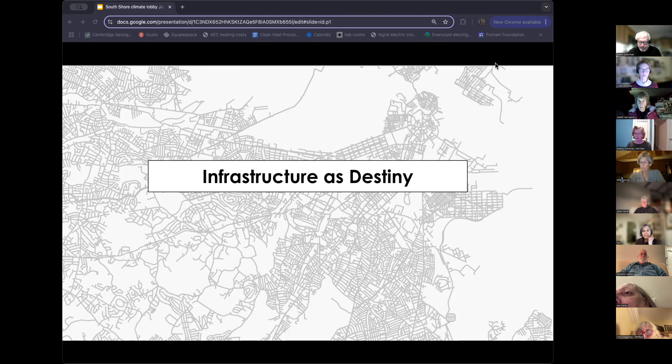Infrastructure as destiny is a phrase I happen to really love. It was made popular by Robin Chase of Zipcar. She pointed out how highways and the internet provide and shape opportunities in all sorts of different ways. And I think that phrase is even more applicable right now to energy infrastructure, not just in terms of affordability and accessibility, but also in terms of climate change.

Especially right in this moment now, we have the chance to change that infrastructure in ways that I think is bigger than any other time in Massachusetts history, where we're not only trying to figure out how to decarbonize, but we're also re-looking at the gas utilities and their infrastructure, as well as how the electric utilities will deliver the electricity we need to be able to move all of our energy needs to clean electricity.

So I'm just going to say, this is the moment. If you ever wanted to get into energy, you can be a hero. So if you want to be a state regulator, you want to become an energy analyst, and of course, you want to become an energy activist or academic, do it now. It is like the biggest, most exciting time.

And so again, I'm going to say that I'm not with HEET anymore. I'm now with HEETlabs. It's a climate solutions incubator. I find really big problems that currently no one is taking effective action in. And I use the black swan as my logo because black swan events are highly unlikely events that can have really big impacts. Most people think of things like COVID and Fukushima, but it can also mean things like discovering penicillin and passing civil rights. So it's just as likely to be a good impact as a bad impact. And that's why that's the logo.

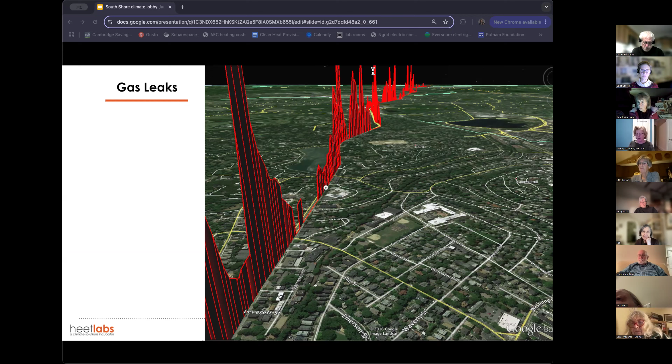So this started off way back in 2014 when I got really interested in gas leaks, partly because there was a Boston University professor who published research showing that there were over 3,000 gas leaks in just Boston alone, and that those gas leaks, because it's methane, which is such a potent greenhouse gas, erased all of the state's energy efficiency programs. So I began to look at gas leaks.

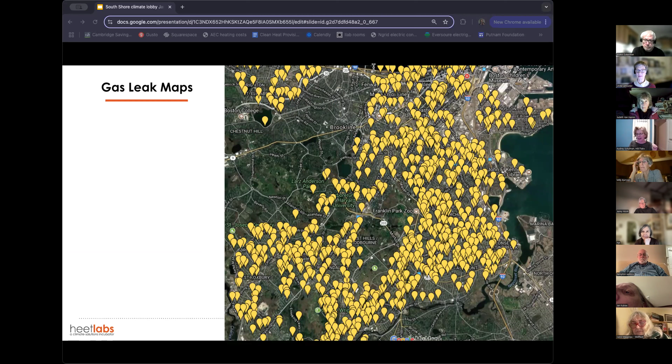I found this really arcane filing on the Department of Public Utilities website that listed by address all of the gas leaks across the state. So I spent a summer with some volunteers mapping all of those gas leaks. There were 350 towns, I think. And it got a lot of news, including the top of the Boston Globe, above the fold, which meant that all the gas utilities suddenly focused on HEET, which they'd never heard of before.

And those gas leak maps got a lot of interest with legislators too. I would bring the maps in to legislators and others, and everybody would always zoom in immediately to their home or their school or their business. It made the global very, very local. But we didn't know quite what to ask for, right? Because the gas utilities couldn't fix all of the roughly 30,000 gas leaks across the state at that point.

So then we learned from research from Boston University about super emitters, which are the roughly 7% of leaks that emit half of all the gas by volume. And so bingo, we knew immediately what we wanted to do, which was have the gas utilities fix these super-emitting leaks. But the problem is they didn't know how to identify them because they'd always been focused before on safety.

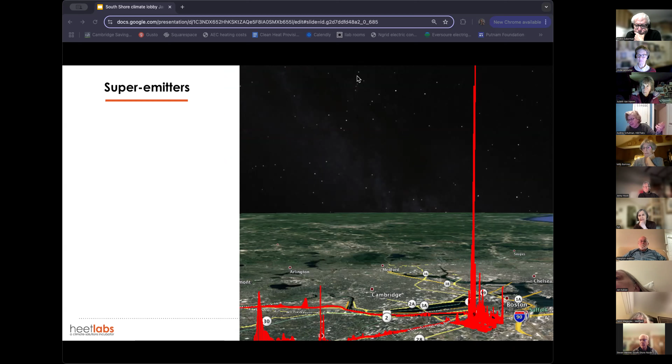And safety meant gas leaks in a small contained space, because gas cannot explode unless it's between 5 and 15% of the air by volume. So if it's less than 5%, you can't light it on fire with a match. And if it's over 15%, you couldn't even use a flame torch and get it to explode, which is sort of fascinating. So they'd always looked at contained spaces instead of these big gas leaks that could be just in the middle of the street and not contained. So we worked to persuade the gas utilities, which we were by then beginning to get to know simply because they were sort of flipped out by the gas leak maps.

So we connected both with Columbia Gas of Massachusetts, which is no longer working in Massachusetts now, as well as Eversource. Both of those companies agreed to participate in the research study to try to figure out how to identify the big gas leaks, the super-emitting gas leaks, so that they could be repaired. But we couldn't get National Grid to talk to us.

So here's trick number one. I guess I should say trick number one first is talk reasonably to gas utilities or to whoever you need to talk to. They're the ones who can repair the gas leaks. I can't repair them, not with a shovel. I don't have a backhoe, etc. I don't have the expertise. They're the ones who have to do it. So talk nicely, reasonably to the people you need to talk to.

Explain the reasons why they should be listening to you, and, you know, research is a great way to get them interested. Because if you talk about how you can research and prove the results in a data-based way, they don't get quite so worried that you're going to just go crazy on them in many ways. But we couldn't get National Grid to focus on us or meet with us.

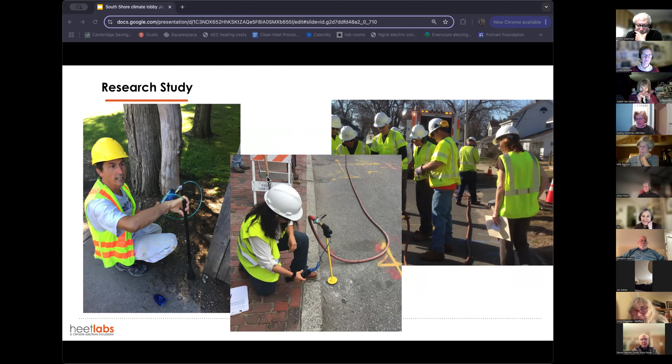We did so. And we came up with an easy proxy method that was highly accurate, for the gas utilities to identify the super-emitting gas leaks. And this is, whatever I'm at, suggestion number three. We arranged this whole thing from the very beginning to have a summit at the end of the summer, at the end of the research study, to announce the findings.

And we asked the heads of the gas utilities at the very beginning of the summer to come and speak at this summit. At MIT, very prestigious, sounds so exciting. And gas utilities rarely, if ever, get to present with environmentalists. And we made sure to invite every regulator we could, every legislator we could. So the gas utilities really wanted to be there.

And so once again, we had that same sort of problem where Columbia Gas immediately agreed to, yes, of course, we should use that proxy method, the identification method you came up with. And Eversource also agreed, but National Grid was a little bit slower. So the Sunday before, I think it was like 2 days before the summit, the head of National Grid called me up with like 15 people on the call.

And all of her experts, and she basically berated them until they would agree to do what we wanted them to do so that she could go and speak at the summit. So once again, giving a carrot as well as doing demonstrations, as well as talking about, like, we're unbiased, this is research. These are ways to begin to pull in the people that you need to pull in to get them to listen to you and do what you want.

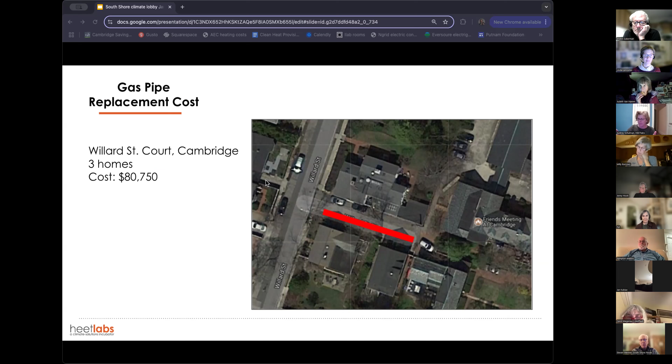So anything installed today will only have 25 years of a lifetime in the street. And that's a waste. That's called stranded assets. It's a bad idea economically. So we went into each of those gas utility offices, to the presidents of each gas utility. And we said, hey, we've got a crazy different idea. First off, you're installing stranded assets today.

You can't imagine the craziness of going into gas utility presidents back then, which was 7 or 8 years ago now, and say, hey, you are going to go bankrupt. You're installing stranded assets. You need to change your business model. But that's what we did. And we said, install something that can be non-emitting, non-combusting, and that can deliver not only heating, but also cooling.

And so we suggested networked ground source heat pumps or networked geothermal. It's a closed loop system, so you're not refilling it with water. It's an ambient temperature system, which means it's somewhere between 40 and 90 degrees approximately. It's a single pipe. And what the gas utilities do is they just deliver water at a reasonable temperature where heat pumps in the home can then take that heating or cooling that they want.

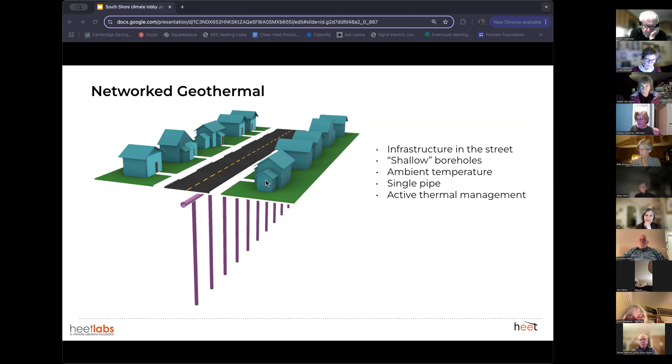And a heat pump is sort of like a fridge that can run forward or backward, that it can pump heat into or out of your home or building. Hopefully everybody's with me on that one. So each of the gas utilities, we went first into Columbia Gas, and he gave us great, like, use this terminology. Don't say that. That's really offensive. He gave us nice advice. And then we went into the next one and he did the same thing. And so we iterated again and again, each time improving.

And Eversource said, hey, you know what we need? We need a feasibility study showing us that this is possible. And so for rock bottom price, it was extraordinary. Buro Happold, which is an international engineering company, we did an RFP, et cetera. But Buro Happold won the RFP, did a feasibility study for statewide, showing that this networked geothermal system, which we at that point called GeoMicroDistrict, could actually meet most of the energy use we needed in Massachusetts, where the gas utilities were. And so Eversource said, thumbs up, love it.

And they asked state regulators, hey, can we install a few of these as a pilot? And the Department of Public Utilities actually said, yeah, you can do one pilot. And so then National Grid was like, okay, we want to try it too. And they asked to, I think, install 4 of them. And I think the Department of Public Utilities said that they could do up to 4 and a certain amount of money, which is extraordinary. Wow. It's like crazy. And so Eversource has now installed and it's live, the system in Framingham.

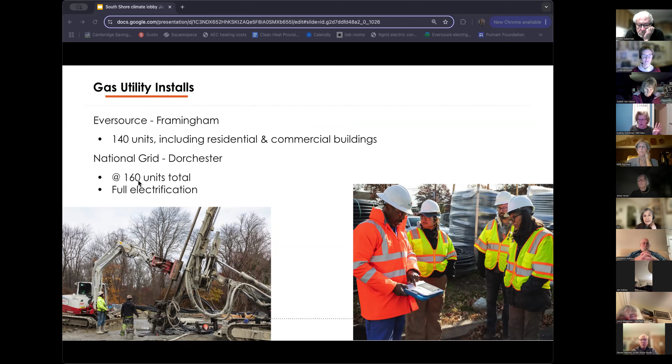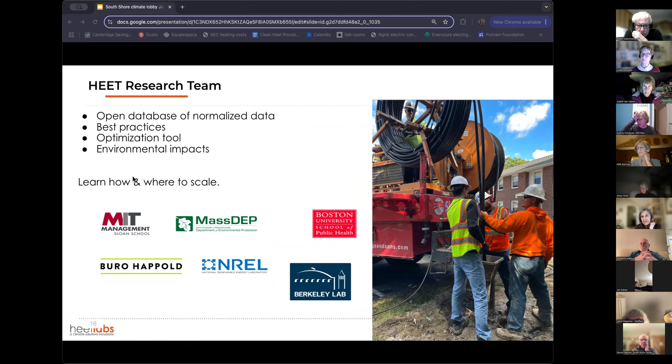So HEET's actually got a research team with a whole bunch of different national labs and universities, and I got just a few of the logos. They will be looking at best practices, how to optimize the system best to decrease future costs, and many, many other things.

Because this made such huge news, that first ever Eversource Framingham installation, I mean, it was talked about in Ukraine. There were stories, I think, in Mongolia or something. I can't even tell you. It was everywhere. Wow. There have been a variety of states that have passed laws to allow gas utilities and others to install these sorts of systems.

And I'll tell you that in New York, this is the one that makes my heart most happy, it was a combination of environmentalists, gas utilities, and workers, so unions, so that you had the trifecta. And this law passed, I think, in 3 months, nearly unanimously, which is just stunning. There's lots of other states, I've lost track of them, that have also passed similar laws.

And then I went around and started to talk to lots of gas utilities across the country about this Framingham installation that you can see in the back. And I would explain it as a business model, because you always want to have what's called theory of mind, which is you talk about how what you want them to do meets their needs. And so I would do that.

And they were like, huh, wow, that sounds cool. It's safer. I could get a lot of profit. It would lower my customer bills. It would provide cooling. They would just name all the benefits; they'd understood them. So

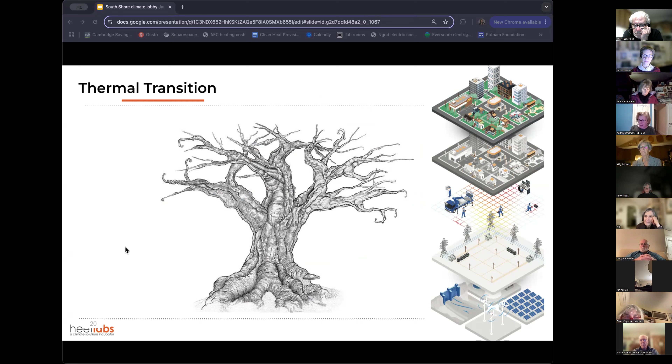So in order to do that, what we need is a tactical thermal transition, where we take electric utility information, like how constrained is it, and how old is the gas system on that street, and how much energy use do you need on that street, and you figure out in an algorithm how to transition the entire gas tree, branch by branch, for the least cost and with the least disruption, to that non-emitting, safer thermal system that we need.

There will be, with luck, some legislation being suggested that covers some of these ideas. And that is things like this. We must have statewide phased integrated gas and electric planning, granular to the level of the street segment, to meet the limits and sublimits of Chapter 21N, which means the emissions, and the DPU mandates. It should be overseen by the Department of Public Utilities and a council convened by the Office of Energy Transformation to make sure it's being done right.

There should be performance-based incentives so that if the gas utilities and the electric utilities do it better, they get more money. If they do it worse, they get less money, right? They should have to increase year by year the amount of money they are spending on non-emitting thermal infrastructure, like that networked geothermal system, and less money every year on gas infrastructure. That gives them a ramp-up time period that's reasonable to get the workforce ready, to meet their supply chain, et cetera.

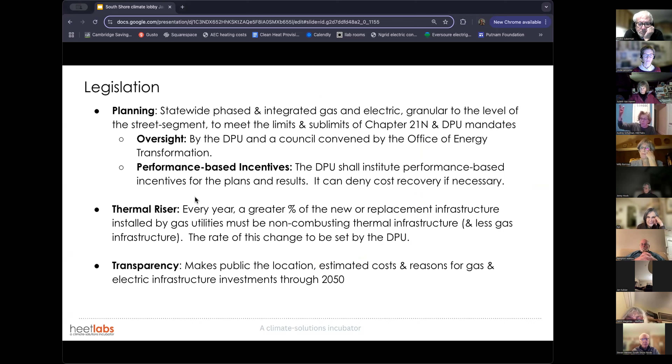And there should be lots of transparency to make sure the public knows about what's happening. As part of this, non-combusting thermal must be considered an equivalent substitute to gas as an essential service, so that you can't have a street where 99 customers are having thermal and one person at the very end is like, I want my gas stove.

And for that one person, you have to keep that unsafe gas or expensive gas main delivering just for that one gas customer. So instead, this would mean that thermal is the same thing as gas, and that that customer has a choice of propane or electricity. And they always have a choice.

Workforce: gas workers should be retrained and transitioned with their pre-existing wages and benefits. And if this integrated gas and electric system planning results in any avoided costs from the efficiencies of scale, from the reduction of electric system upgrades that are needed, any savings at all, 70% of those avoided costs will go towards building retrofits, because the building retrofits are going to be expensive. And low and moderate income customers must be prioritized.

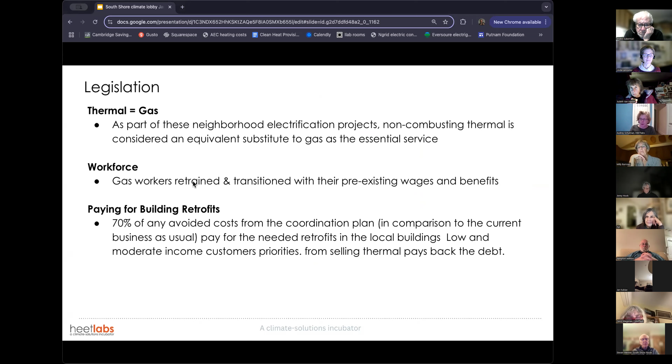And I think I made some typos there, but pay no attention to that. And that's it, I think. Oh, and wait, I was going to show you one other thing.

When necessary, to get whoever you need to pay attention, you can always do a demonstration. And so what we would frequently do is, like with Mothers Out Front, which is a large activist organization, we would ask them to do a demonstration and give them the information they needed to do the demonstration in some place smart, like where there's a big gas leak.

And then we'd give them the megaphone, we'd get the reporter there, we would do everything we needed to make sure we had the news. We had the drone shot, everything to make sure that we could go into the gas utilities the next day and say, oh my God, that's terrible. And so that is the scoop.

Thank you. I'm gonna have to figure out how to unshare. Let's see. For some reason. Okay, there we go. There we go. Well, bravo, Audrey. That's just magnificent. Yes. Open for questions?

Yeah, what's the state of the Framingham project now, Audrey? Is it producing energy? Yes, it's on. It's delivering temperature to, I think, 140 different units, including, like I said, a school or part of a school, a fire station, some businesses, a lot of multi-unit low-income houses, and some single-family market rate homes.